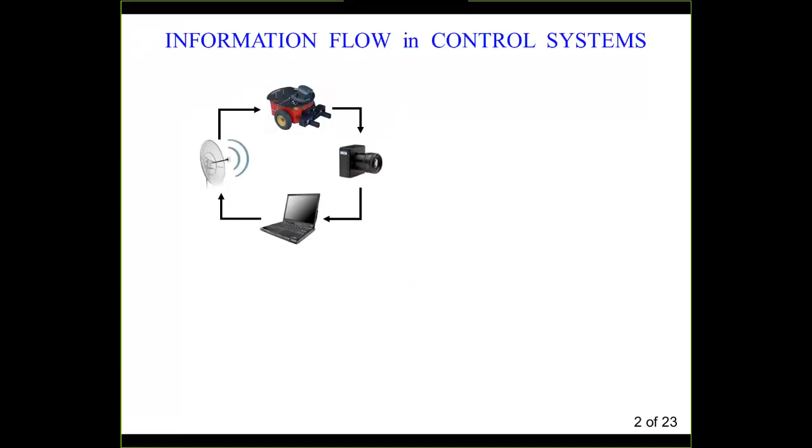So in such situations, in addition to classical control theoretic considerations, it's important to take into account these information processing devices in the feedback loop and the effect that they have on the control design. And this becomes especially important when this one feedback loop is just a small portion of the overall network control system, with many feedback loops sharing the network and sharing the information resources.

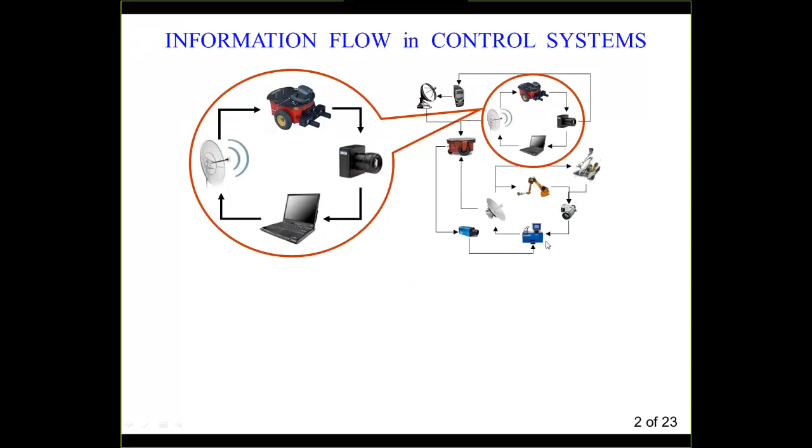So in such situations, several important issues arise. You may have coarse sensing in the system for either cost reasons or physical reasons. It may be impossible to install sensors with the desirable resolution in all the places that you would like. You may have limited communication capacity because the bandwidth in the system may be limited, or, as I said, shared by several feedback loops. Also, even if you're able to send a lot of information through the channel, you may not want to send more than absolutely necessary because of security considerations.

And what I said about sensing also applies to actuation. So your actuators may be limited to something that's very simple, that maybe is event-driven, taking only finitely many values. And above all, at least for me, there is a great amount of theoretical interest to address these problems and to develop a comprehensive theory that captures both the control design and the flow of information in the system. This area has been quite active over the past few decades.

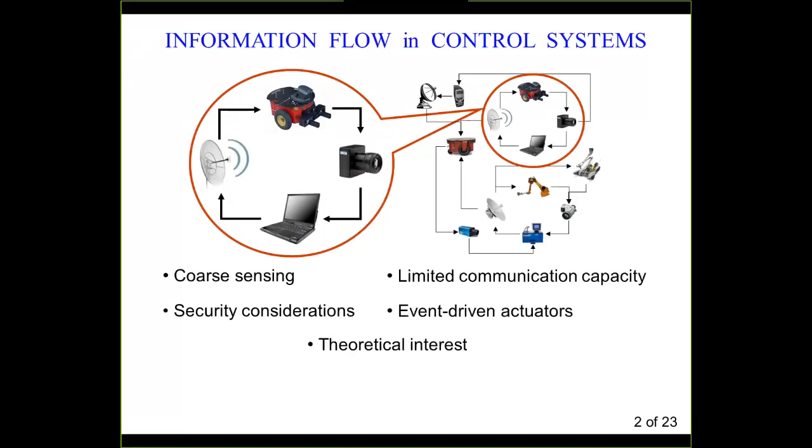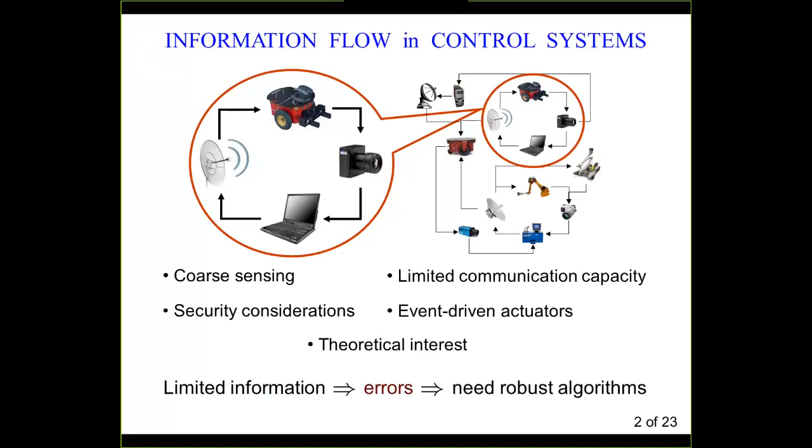So what I am going to focus on in this talk is that this limited information leads to all sorts of errors. These could be, for example, quantization errors, errors resulting from analog to digital conversion, delays, and so on. And when we develop control algorithms, we need to make sure that they have appropriate robustness to these errors. So that is basically what I'm going to be addressing in this talk.

Now, moving a bit closer to the specific topics, I will be talking about observer-based output feedback control. This diagram represents the plant and the controller, connected to the sensors, and this channel, which may introduce some errors due, for example, to quantization. Then I have an observer, which generates an estimate of the state of the plant, and this estimate is fed to the controller, which is connected in feedback with the system. And the errors propagate through the system as shown by these red arrows here.

So if you have errors affecting the information coming out of the sensors, these errors in turn affect the ability of the observer to produce a good estimate of the plant. And the errors affecting this estimate, which I denote by x hat, in turn affect the ability of the controller to provide satisfactory performance to the feedback loop. And so this is the issue in front of us.

If you look at the literature, relatively little is known about the effects of the error propagation on the right side of the diagram. There's been quite a bit of research about designing controllers robust to various errors and disturbances, but relatively less research about designing observers that have robustness in a similar sense to errors and disturbances affecting sensor measurements. So we're interested in both, but there is more of a gap to be filled for the observer design, and that's why I'll be focusing a bit more on that part in this talk.

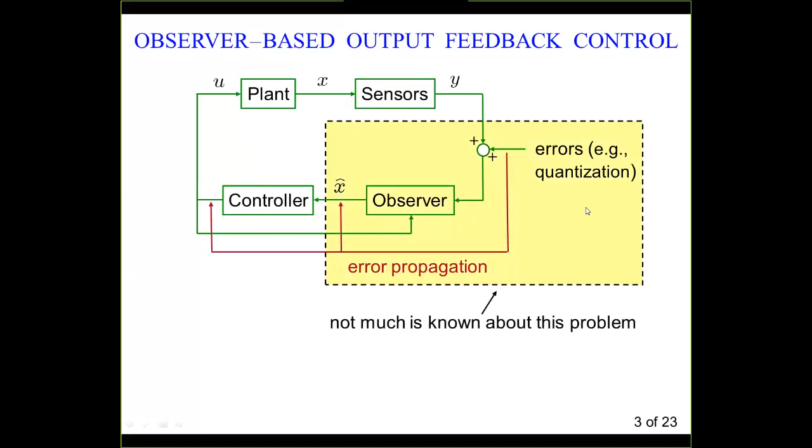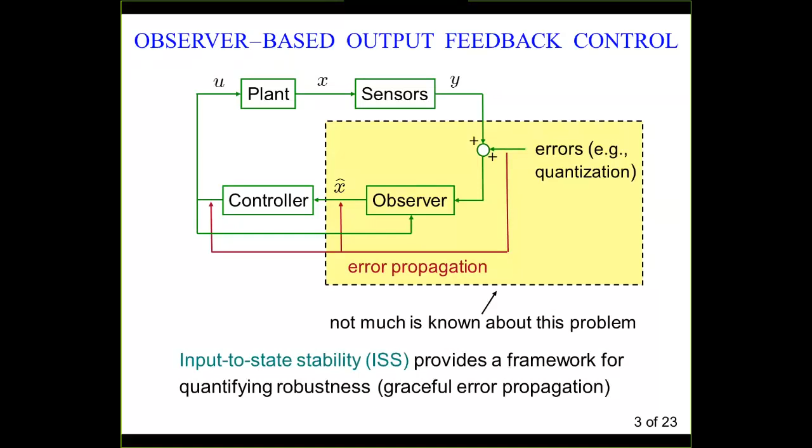And the main technical tool that I'll use will be input-to-state stability, or ISS, which in my mind provides a good framework for characterizing the robustness, or graceful degradation of performance, in response to errors present in the system. I'll provide a quick review of ISS, and then it will be used as a technical tool throughout the talk.

So this is my talk outline. I'll give a brief overview of ISS, which will serve as a quick introduction, but I'll also provide a new technical result having to do with the so-called asymptotic-ratio characterization of ISS. After that, I'll move to the main part of the talk, about designing observers robust to measurement disturbances. I will talk about the formulation of the problem, and some Lyapunov-based conditions for checking robustness of the observers. I will apply this to the setting of output feedback control from the previous slide.

And then I'll discuss two applications to problems in synchronization under measurement error. So before I go to the technical details, let me mention the references on which this work is based. And I'd like to acknowledge my co-author, Professor Hyungbo Shim from Seoul National University in Korea, with whom we wrote a couple of papers that serve as a basis for much of this talk.

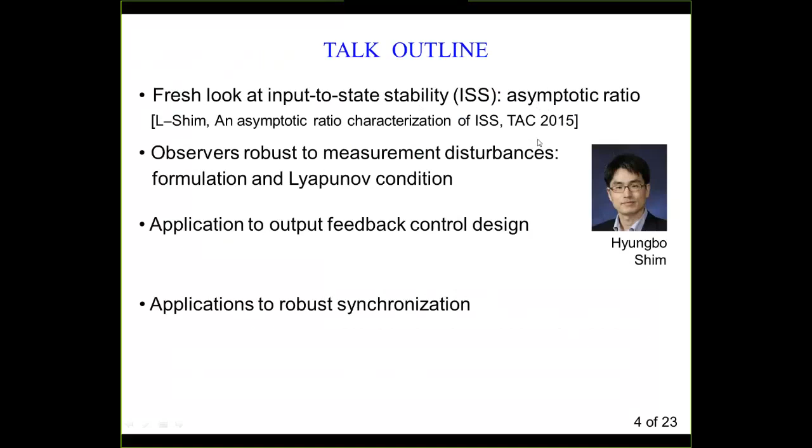The first paper here is a technical note in Transactions in 2015, which talks about this asymptotic-ratio characterization of ISS. And then a longer paper in Transactions the following year talks both about the observer design that I'll present and also about its use in control design. And there's also an earlier paper that appeared in CDC several years before that.

And then as applications to robust synchronization, I will talk about two examples. One is the work that we are currently doing with my colleagues at Illinois. We actually just 3 days ago submitted a CDC paper on this. It has to do with applications to synchronizing electric power generators. And then the second example that I'll present is work done with my colleagues in St. Petersburg, Russian Academy of Sciences, on an example of a Lorenz chaotic system.

So let me go to the first part, which is a quick refresher about input to state stability. This is a notion that was introduced by Eduardo Sontag in the late 80s and has been very influential in nonlinear system theory as a tool for capturing and studying the effect of disturbances in nonlinear systems, particularly nonlinear control systems. So let's consider a system of this form: x dot equals f of x and d. So here x is the state, d is an external disturbance.

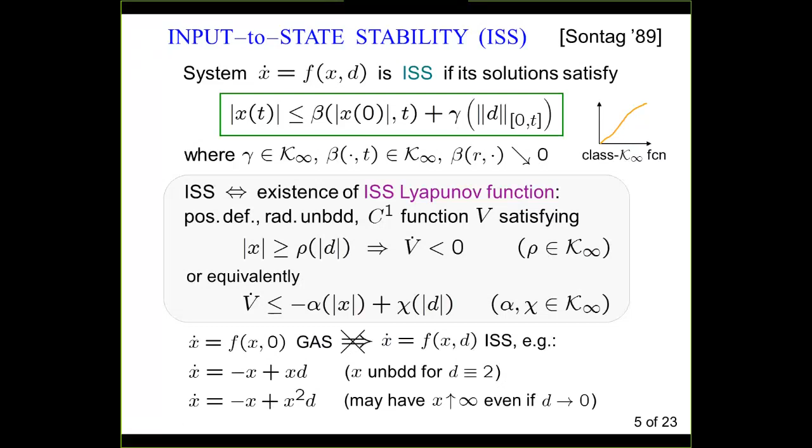I will quickly mention this asymptotic ratio version of the ISS Lyapunov function condition because we will use it later for observer design. So here I'm just copying the two ISS Lyapunov function conditions that I had before. And I, by definition, say that V is an asymptotic ratio ISS Lyapunov function if it satisfies the following dissipation inequality. So here, unlike in inequality 2, the second term depends both on the state and on the disturbance.

And I have several conditions that I'm requiring from my functions, which are not very important right now to focus on. But the main one, and this is what motivates the name asymptotic ratio, is that if you divide G by alpha 3, so G is the positive term, alpha 3 is the negative term, the limit superior of this as the first argument increases, and the first argument really is the norm of the state, for a fixed size of the disturbance, this ratio should be less than 1. So asymptotically, this ratio should be less than 1 when you fix the disturbance magnitude and increase the magnitude of the state.

And in case, by the way, you're wondering why it's alpha 3, well, I'm following the notation that's used in our papers, and the reason it's alpha 3 is because we typically have alpha 1 and alpha 2, which provide lower and upper bounds for the Lyapunov function. I'm just not showing those two functions on the slide.

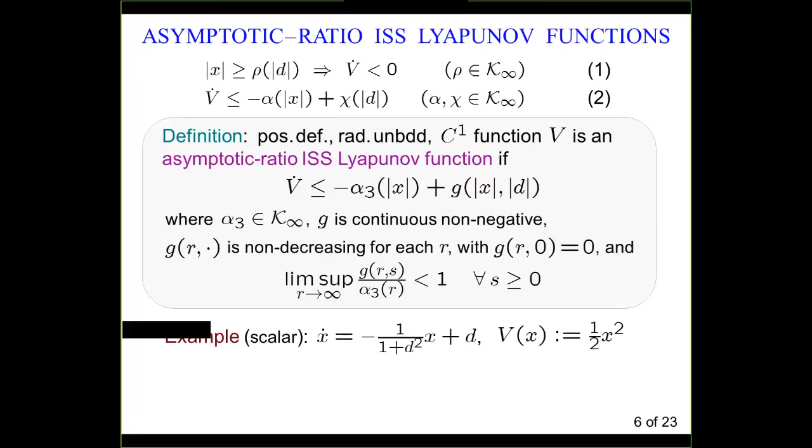Okay, so just a quick example. This is something that you may want to work out more slowly later, but if I consider the simple scalar system and I take V to be just half x squared, I have this expression for the derivative of V, and I can manipulate it to this, and then I note that this is my dissipation, this is my minus alpha 3, and this is my g of x and d.

And if I were to divide g by alpha 3, I would get this ratio, d squared over 1 plus d squared, which is less than 1. And the second term, when divided by x squared, would go to 0. So the asymptotic ratio condition is satisfied.

On the other hand, I invite you to try to prove ISS of the system using more standard properties, like properties 1 and 2 listed on top of the slide. It is possible, but I think it is more challenging than using the asymptotic ratio characterization. The trade-off here is that we don't get any information about the ISS gain from this asymptotic ratio Lyapunov function.

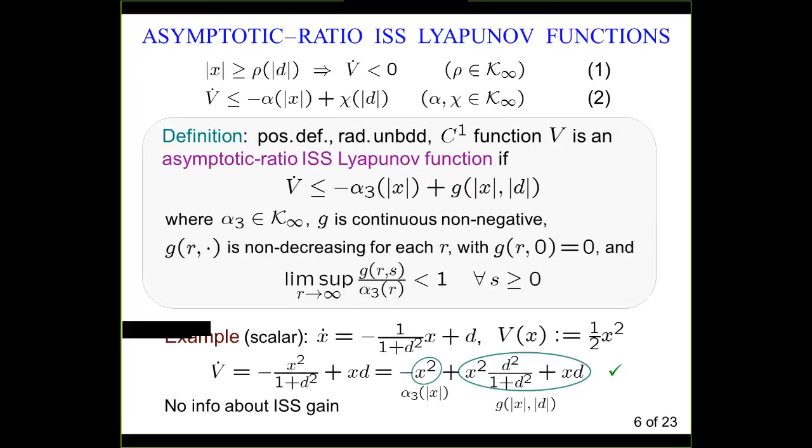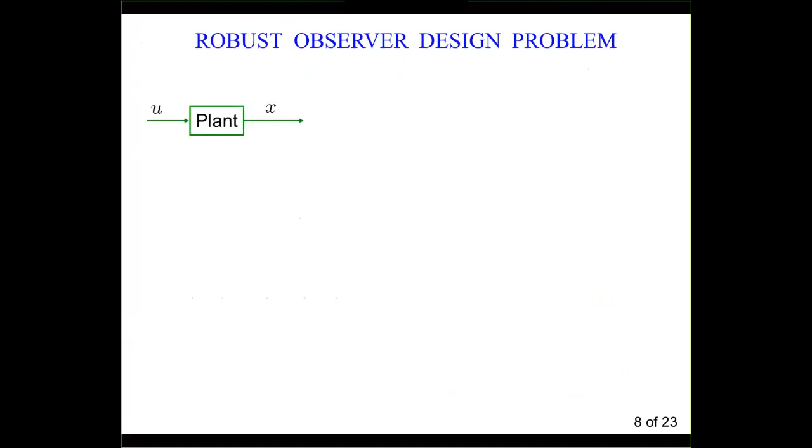Now, having hopefully warmed you up to this notion of ISS and having recalled the Lyapunov characterizations of ISS, let me now go to the main part, which is the observer design. So the robust observer design problem, in general terms, is formulated as follows. I have a plant. I have sensors that measure the output Y, which is corrupted by disturbance. So the formulas are here. Note that in the picture, the disturbance enters additively, but this need not be the case. It can enter in a general way as well.

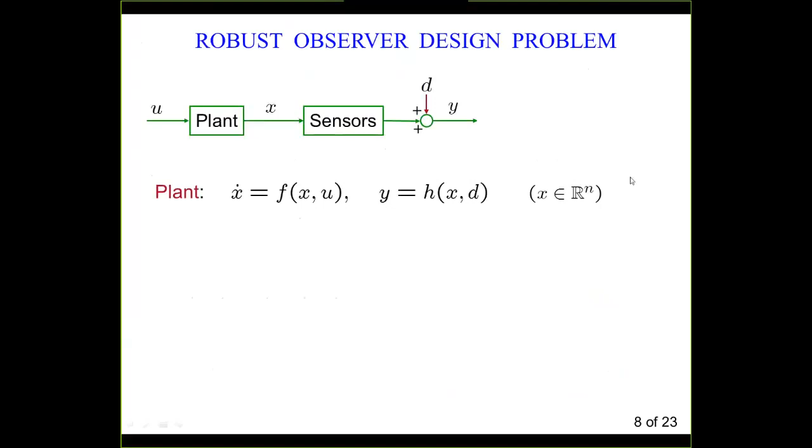Then I'm trying to build an observer which accepts as input the measured output as well as the control input of the plant, and the goal is to produce the estimate x hat of the state. So I have formulas for the observer here. The state of the observer may have the same dimension as the state of the plant, in which case we call it a full order observer. Otherwise, if the state dimension m is smaller than the state dimension n of the plant, we call it a reduced order observer.

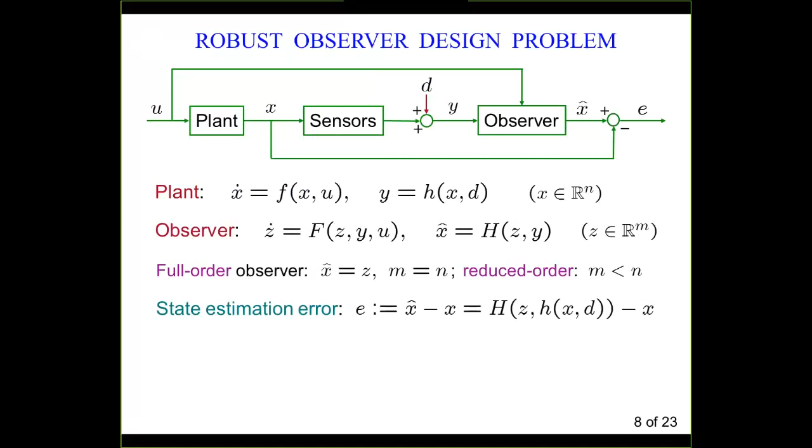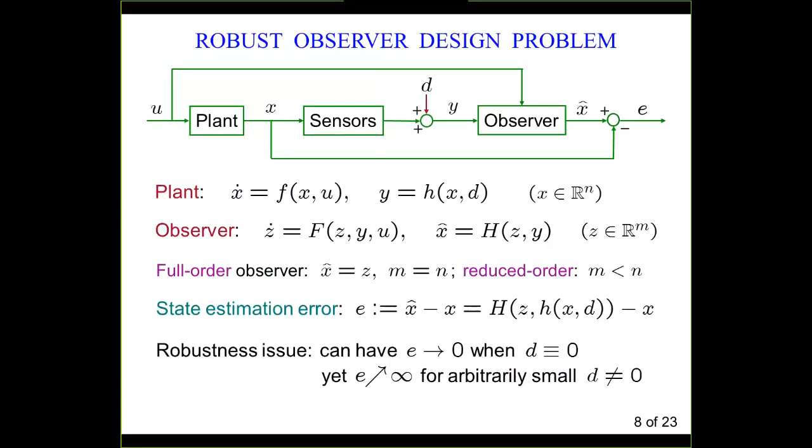And then you look at the error between x and x hat, we call it E, state estimation error. And the robustness issue, just like I had similar examples earlier illustrating that asymptotic stability under zero disturbances does not imply ISS, you can construct examples where the observer behaves well when there's no disturbance. It asymptotically correctly estimates the state, but the estimation error goes to infinity even when a very small disturbance D is present.

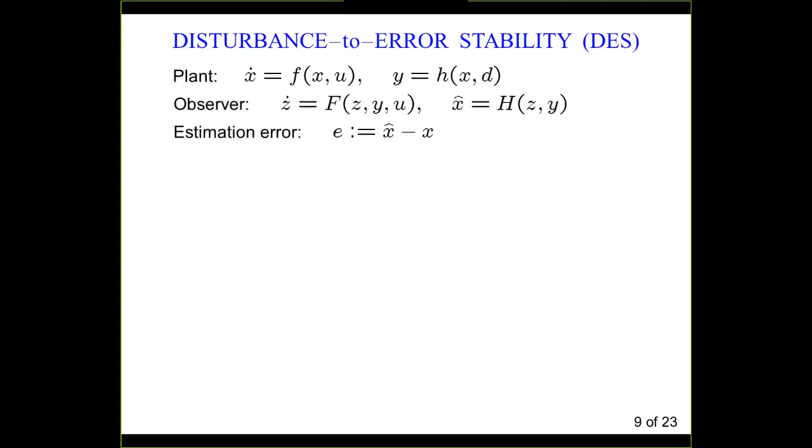So that's the robustness issue. First, we need to define what robustness property we want to have from the observer. So here I'm just copying the equations that I had before. You don't have to go through them. They're just here for your reference. And there's a natural ISS-like robustness notion that people have considered before. In our work, we call it DES, for disturbance to error stability. As the name suggests, it's very much in the spirit of ISS.

And we call the observer DES if the estimation error satisfies this ISS estimate with respect to the disturbance. So it looks very standard if you take the ISS notion as a benchmark. And several known conditions for this exist. So Sontag, Wang, and David Angeli worked on this. However, as is noted in these papers, these conditions are quite strong. So this property of DES is quite restrictive.

It's not very easy to obtain it even for classes of systems for which asymptotic observers are well known to exist and how to construct them. And another drawback of this DES notion is it's coordinate dependent, in the sense that in one coordinate system you may have it satisfied, but if you apply a change of coordinates as given by this function phi, the diffeomorphism on our state space, then you may lose this, so that one does not imply the other.

So what we'd like to do is have some condition for robustness that is easier to verify and also enjoys coordinate independence. And it turns out that a path towards formulating such a condition is to impose disturbance to error stability not globally, but only as long as the state and the input are bounded. So I will elaborate on this, but the basic motivation is that eventually you're going to connect your plant with a controller, which is hopefully going to keep the state bounded.

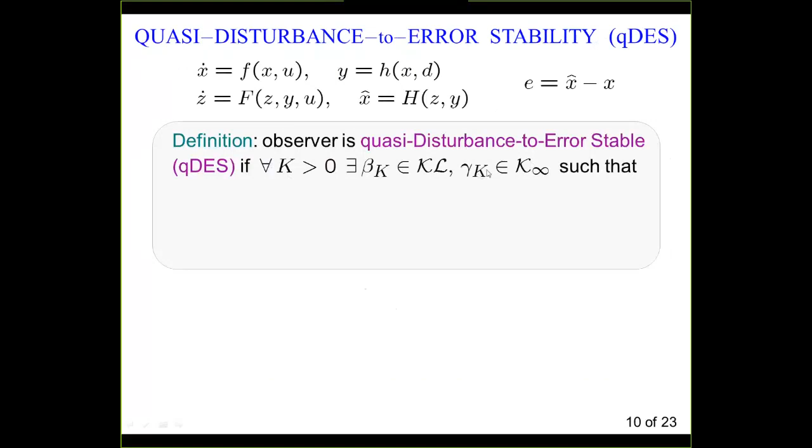So for the same equations for the plant and the observer, we say the observer is quasi-DES if the following holds. So here we're tweaking the DES definition in the following way. We say that for every positive constant k, there should exist functions beta and gamma, which depend on this k, such that the ISS estimate, the same as I had before, holds as long as both the control input to the plant and the state of the plant are upper bounded by k.

In other words, if you give me a ball or any compact set in which your state and control input live, I should find a pair of functions beta and gamma for which the ISS estimate in the green box holds. You give me a larger set, I may have to change my beta and gamma, but I should be able to find a pair of these functions for any compact set. However, I'm not asking that a global pair beta and gamma exists that captures all values of x and u.

So for any compact range of values for x and u, this is ISS from disturbance to error, but it's not globally DES. So it suggests that it's much easier to look for quasi-DES observers than it is for DES observers. And you can also show that the quasi-DES property is invariant to coordinate changes, because essentially what was causing DES not to be coordinate independent was the behavior at infinity, which we are somehow eliminating here.

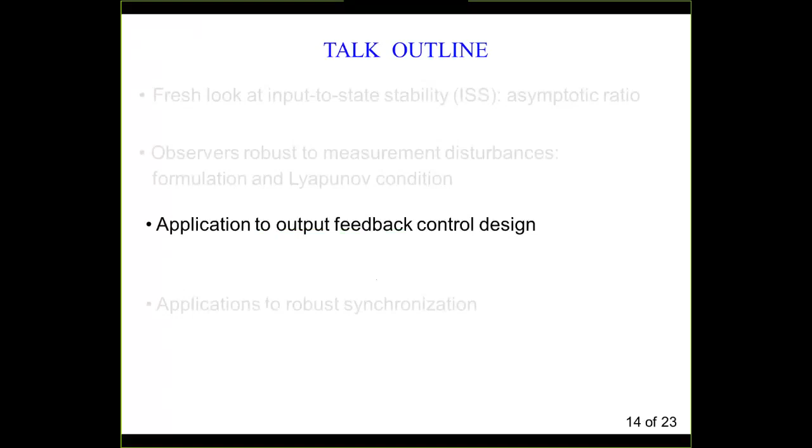Okay, so now having covered the basic idea of what we mean by robust observer and what may be Lyapunov type sufficient conditions for it, in the remaining 20 minutes or so, let me talk about applying this idea to control design and later to synchronization. So for output feedback control, let's revisit this diagram that I had before. So let's put in some formulas in these boxes.

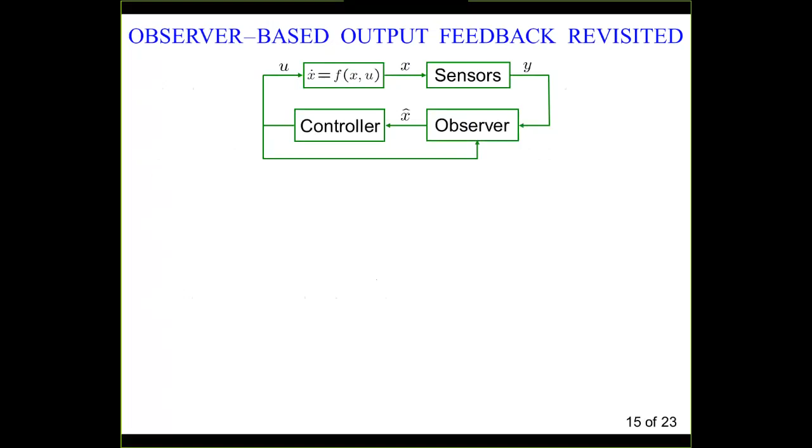So I have a nonlinear system with state X and input U. I have some sensor measurements giving me the output Y, which is affected by disturbance D. I have an observer here, which I assume, as you may see from the formulas, to be a full order observer at this point. And I have a controller here, which for this diagram, I'm assuming to be a static control law, U equals K of X plus E, where E is the error with which the observer reconstructs the state X.

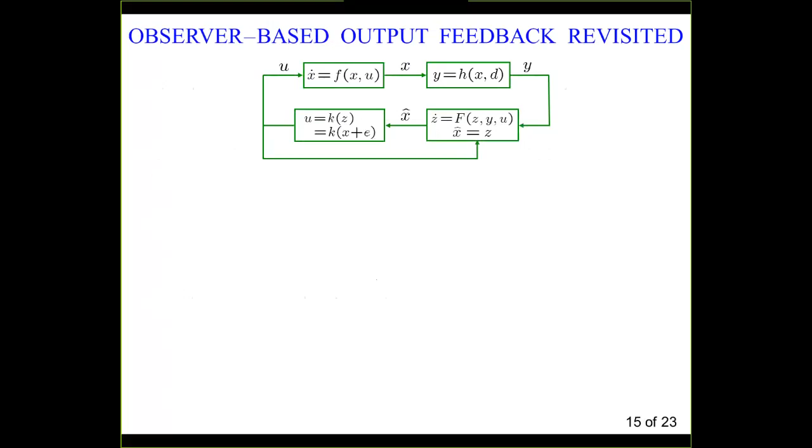So if you assume that the observer is robust in the sense that I just described, then you also need to characterize the robustness of this controller with respect to the resulting state estimation error. And for this, it is a standard assumption to assume that the controller is input to state stabilizing with respect to the state estimation error. So if you act on the plant with the control U equals K of X plus E, then the plant satisfies the ISS estimate with respect to this error E.

So this property is quite well studied in the literature. I list here several references for it. It's known to be quite difficult. So it's only for some special classes of systems and for some special controller designs that you can prove that you can have this property. Nevertheless, for the purposes of this talk, I'm going to take it as an assumption.

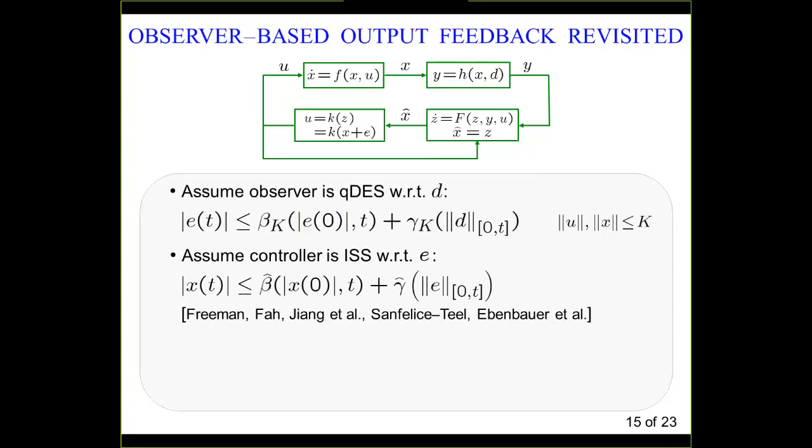And then if you have these two conditions in place, you can show via a cascade argument that the closed loop system is quasi-ISS in the sense that, this formula may look a little bit complicated, but it's basically saying that the overall state of the system, which includes the plant state X and the observer state Z, satisfies an ISS estimate with respect to the disturbance. And again, this estimate is not global, but semi-global, if you will. So for any size K of the state and the input, you have the corresponding functions beta bar K and gamma bar K, which validate this ISS condition.

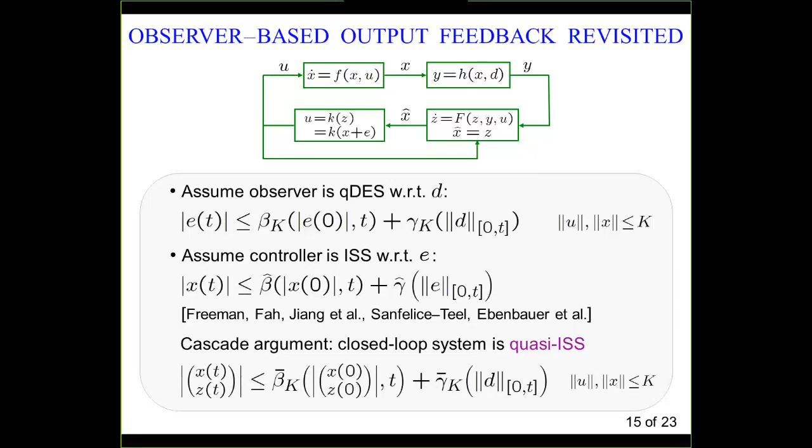So the message here is if you design the observer to be robust in the semi-global sense, and you have a controller that's robust in the more standard ISS sense, then when you interconnect them together, you have, again, this robustness to disturbances in the semi-global or quasi-ISS sense, which is not really surprising.

And so one application that we worked out that I'll mention only quickly because perhaps some of you may be more interested in the other applications that are coming later. But we worked on the case where the disturbance generator is a quantizer. We have quantized output feedback, and it's the quantization that causes the disturbance. So you have this quasi-ISS property from the previous slide with respect to disturbance, no matter what the disturbance is. But in this particular case, the source of the disturbance is quantization.

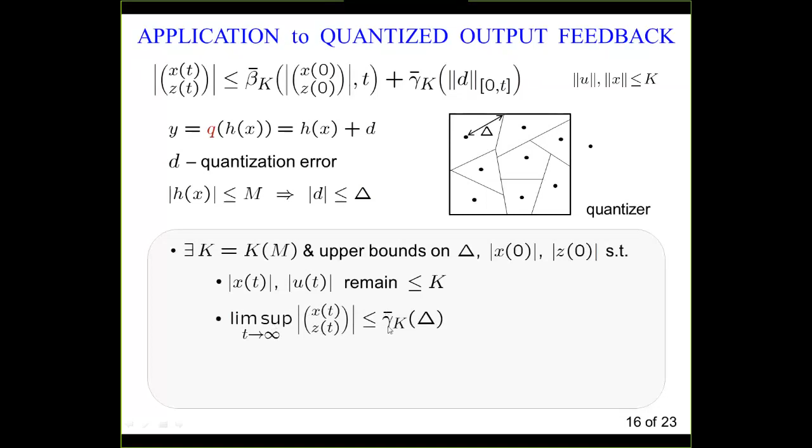And then we worked out the result, which says that based on the size m of this bounded quantization region, you can compute a constant k and the upper bound on the quantization error as well as the initial condition, such that, first of all, you guarantee that the state and the input remain bounded by k. And then you prove that the state of the plant as well as the observer state are ultimately bounded by some nonlinear gain function of your quantizer resolution delta.

And if your quantization is fine enough, then this bound will actually be smaller than the initial bound on the state. So that means you have a contraction. And if you want to actually achieve asymptotic stability, there is a technique known as dynamic zooming. By zooming in and refining your quantization, you can in principle achieve asymptotic convergence to zero using this result. So if you're interested in this quantized output scenario, you can look up details in our transactions paper that I cited at the beginning of the talk.

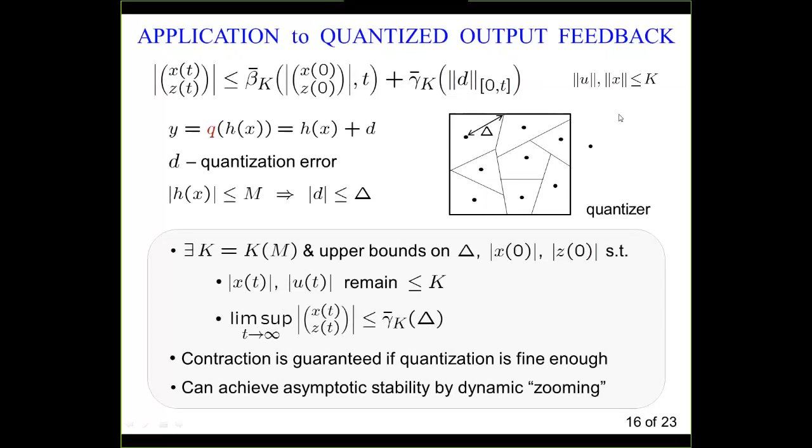Therefore, there may be some other dynamics on top here, but I'm ignoring those because for the purposes of synchronization, x1 is statically available through my measurement. So my observer problem only consists in building an observer for the second portion of the state of the leader. And so accordingly, I focus on the synchronization error, which is the difference between Z and X.

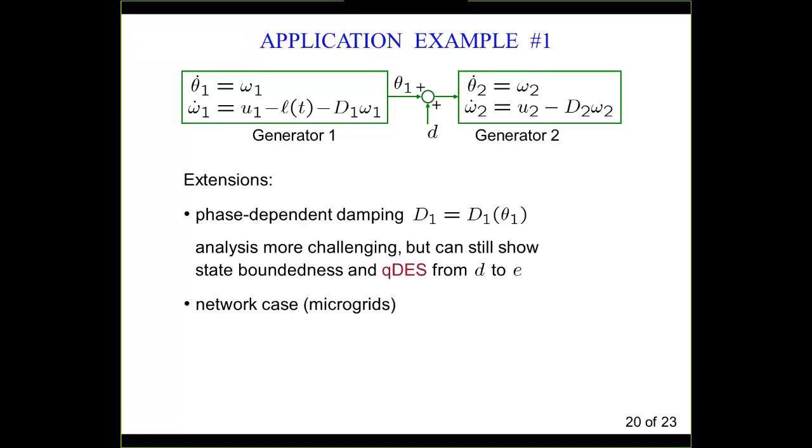And what we're also ultimately interested in is looking at the network case. So in the microgrid setting, you can think of this first generator as a stand-in for a network of generators servicing several loads. And the system on the left would then be an average system capturing the average of the dynamics servicing this average load. And then it would be a more interesting case where you're trying to connect another generator to this already operational network of generators. So that's something that we're working on.

And what we focused on in our paper that I cited earlier is the case where the disturbance D comes from time sampling and quantization applied to the measurements of x1. And in that case, we're able to derive a concrete bound on the synchronization error, which depends on the data rate in the channel that causes time sampling and quantization.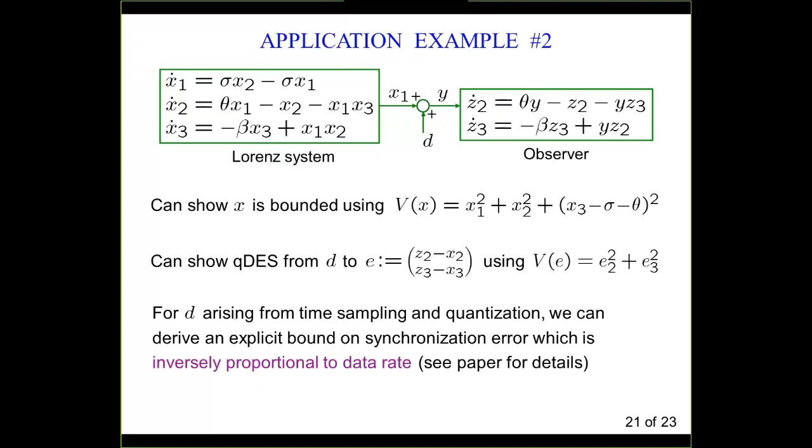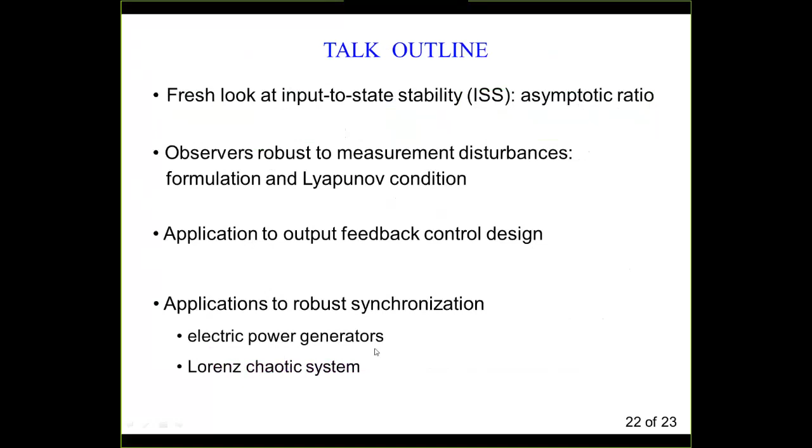And so some future work that remains to be done. So for nonlinear quasi-DES observer design, we still need to understand better how to identify classes of systems to which our conditions apply and how to constructively design observers for these systems. For quantized output feedback control, a big issue is to be able to relax the ISS controller assumption, which, as I said, is quite restrictive.

In robust synchronization, I'm basically looking for other examples that I might be able to handle using the framework. So if you have some ideas, please don't hesitate to let me know. And you can find all the papers I mentioned at my website.

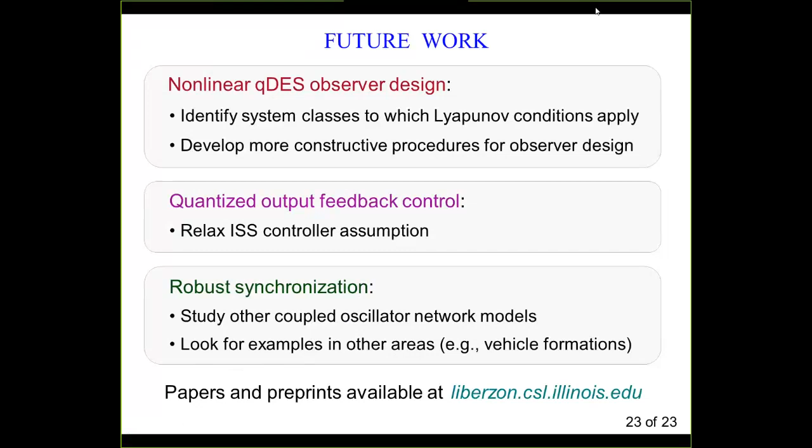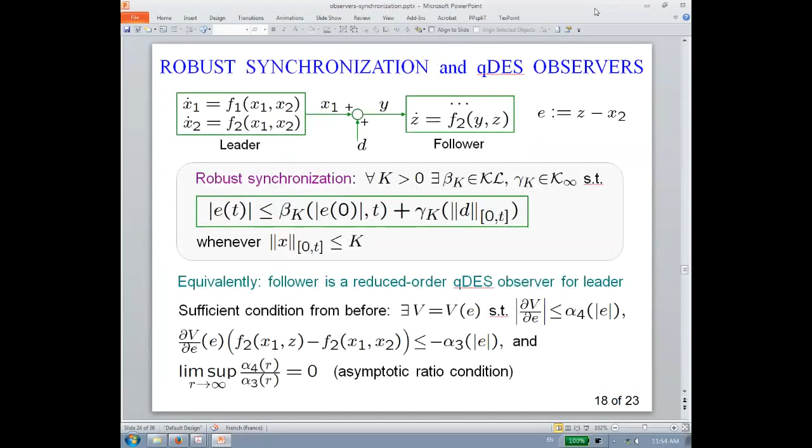John Cooper is asking, is there an analog to this technique for input disturbances? For input disturbances. Okay, so that's actually a very nice question. So the setting that we have here, if I go back, maybe let's say to synchronization or to this diagram, right? So the setting here is that I have a sensor, and then the disturbance affects the sensor measurement, and then I have an observer that acts on that.

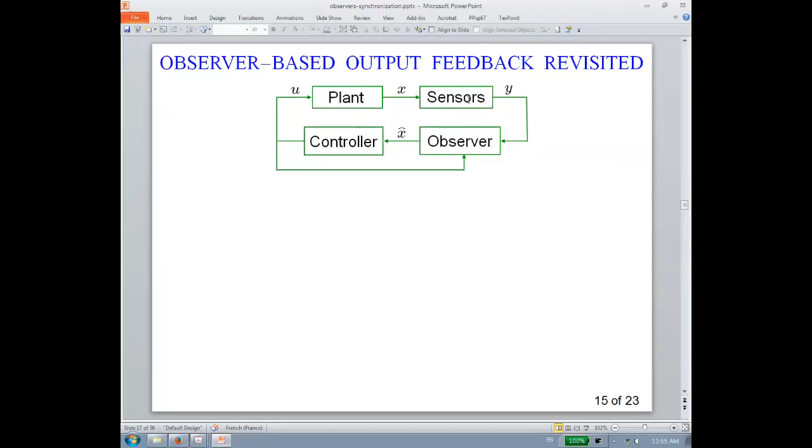So for focusing on observer design, we were mainly focusing on sensor measurements. However, if you look at the Lyapunov conditions that we have written down, at some point, when you go through the math, it stops being important where the error came from, right? So if you write down these conditions, or maybe there's a better illustration when I was talking about these Lyapunov-based conditions, right? So as long as the Lyapunov function satisfies a certain dissipation inequality, the disturbance appears here, but at this point, it's not that important where the disturbance actually came from.

So I would say the short answer is that the Lyapunov framework in principle is applicable to disturbances arising in a different way. But on the other hand, I think some of the conditions that we worked out are specifically tailored to the observer design framework. And so it would have to be checked whether these conditions are still meaningful. But in principle, mathematically speaking, they can capture disturbances entering in different parts of the system as well.